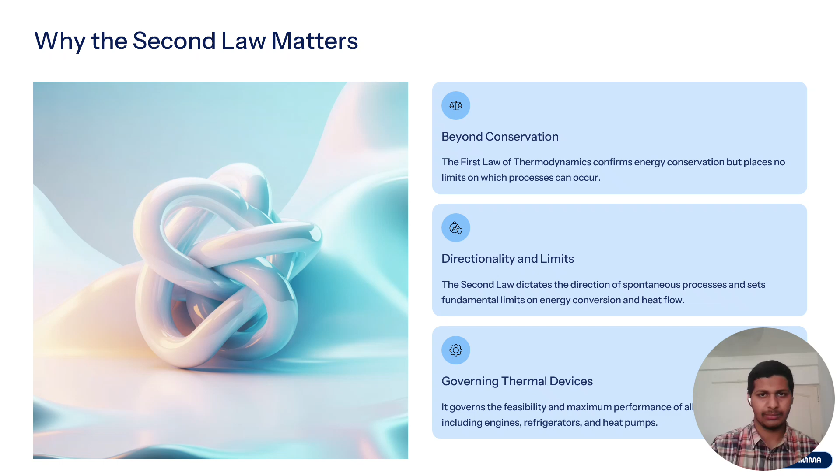Now let's talk about the Kelvin-Planck statement. The Kelvin-Planck statement of the second law defines the limitation of the heat engines. It states that it is impossible to construct a device that operates in a cyclic process and produces no effect other than the extraction of heat from a single reservoir and the performance of an equivalent amount of work. In simple terms, this means no heat engine can convert all the heat it receives into work. Some part of the heat must always be rejected to a cooler sink.

This statement sets a natural limit on efficiency. Even the best designed engines like steam turbines or car engines cannot be 100% efficient because of this unavoidable heat loss. So, the Kelvin-Planck statement reminds us that every real engine must have both a heat source and a heat sink, and that some energy will always be lost as waste heat, making perfect efficiency physically impossible.

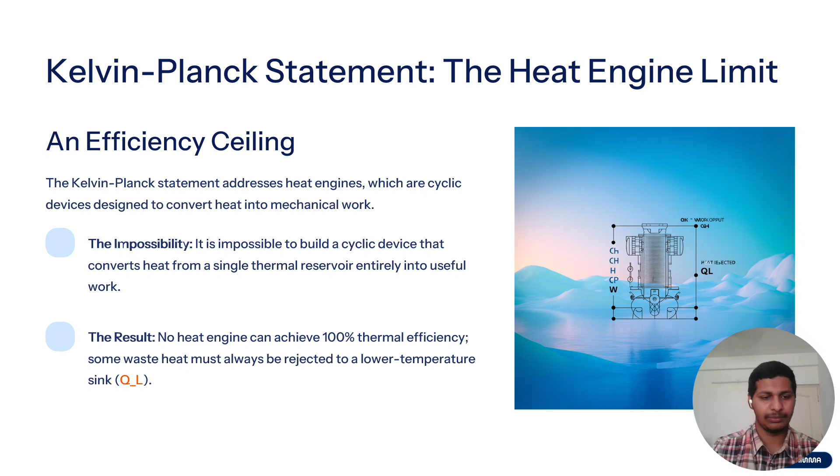The Clausius statement of the second law explains the limitations of refrigeration and heat pumps. It states that it is impossible to construct a device that operates in a cycle and transfers heat from a colder body to a hotter body without any external work. In simpler terms, this means heat cannot flow naturally from cold to hot. It requires an input of work.

This is why refrigerators, air conditioners, and heat pumps need electric energy to run. The compressor inside does work to move heat against its natural direction, from the cold interior to the warmer surroundings. The Clausius statement sets the fundamental limit of refrigeration performance and explains why cooling devices always consume power. It also complements the Kelvin-Planck statement.

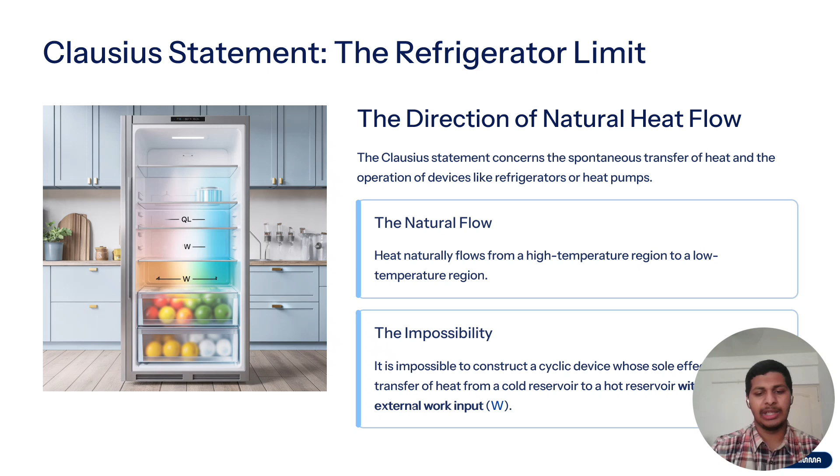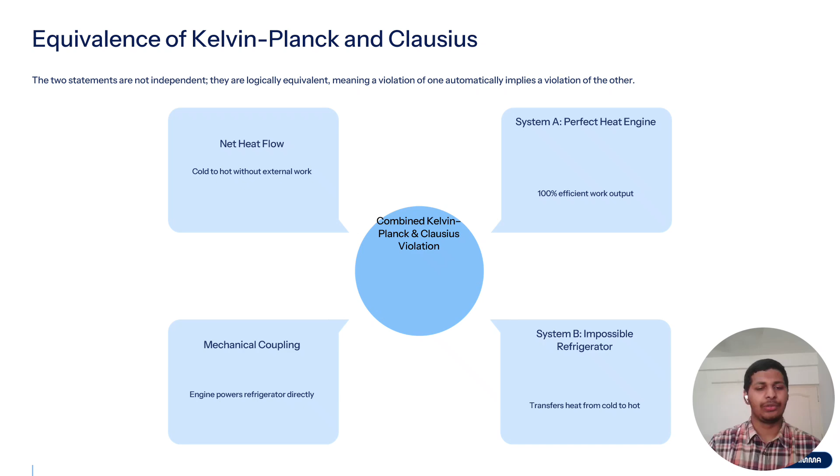While that one limits how much work we can get from heat, this one limits how much cooling we can achieve without work input. These two statements may sound different, but they are equivalent. If one could be violated, the other would also be violated. For example, if a refrigerator could transfer heat from cold to hot without work, we could combine it with an engine to make a system that produces work with no heat loss, violating Kelvin-Planck. So both statements express the same fundamental truth.

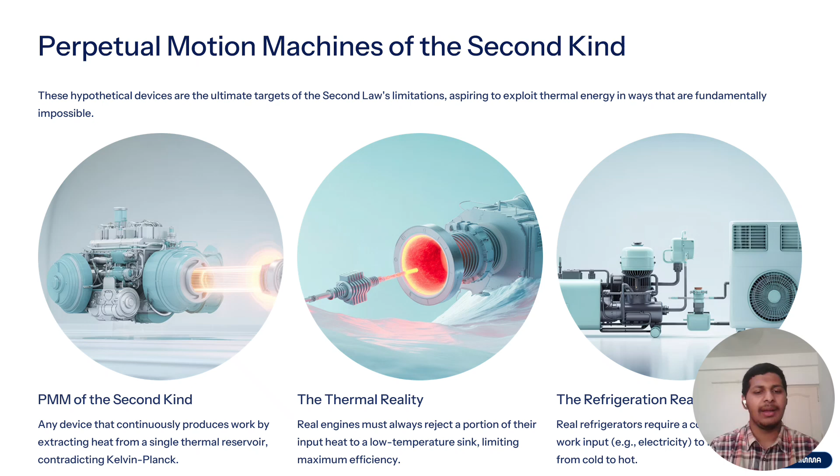These two statements relate to the design of a perpetual motion machine of the second kind, or perpetual motion machine 2. It is a hypothetical device that converts all absorbed heat into work continuously without losses. The second law tells us such a machine is impossible. Real machines always have friction, losses, and some waste heat, making 100% conversion of energy unachievable.

Let's consider a real-world application as a case study of the second law of thermodynamics. We have taken the example of heat engines. Heat engines are practical applications of the second law of thermodynamics. Examples include car engines, steam turbines, and power plants. In all these, heat from fuel is partially converted into mechanical work, while some heat is released to the surroundings. Engineers use the second law to maximize efficiency by reducing waste heat and improving the design.

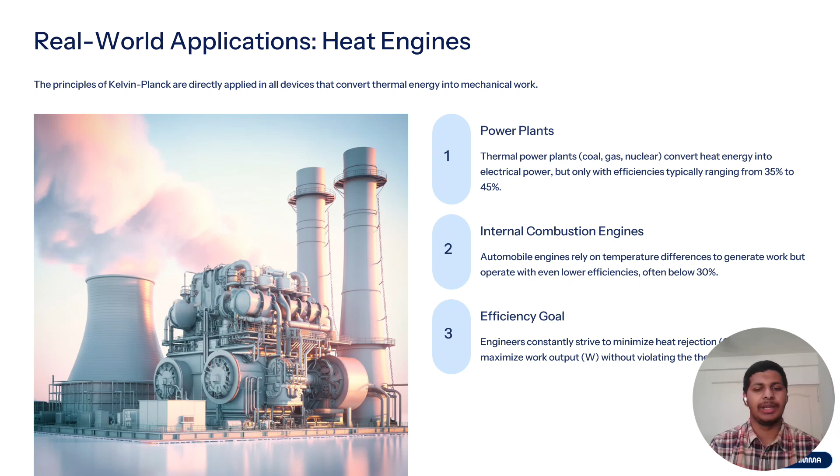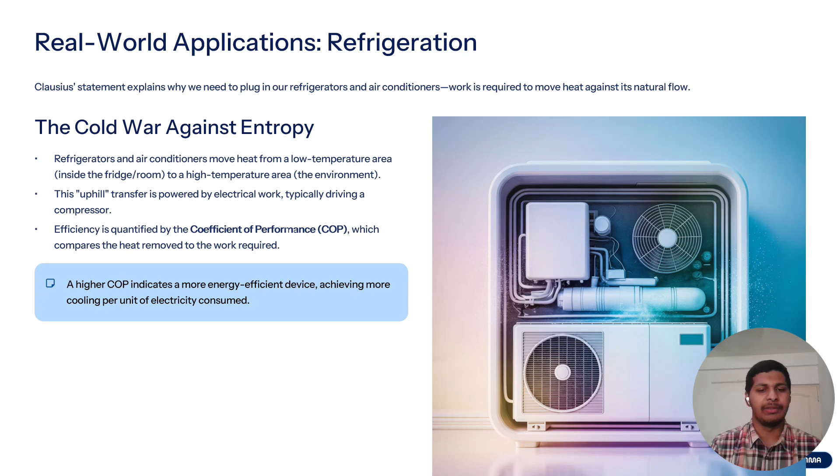Similarly, we have the real world example of refrigerators, which also follow the second law. The second law also governs refrigerators and air conditioners. These devices use mechanical work to transfer heat from low temperature regions to higher temperature regions. Understanding this law helps us design systems with better coefficients of performance and lower energy consumption, like modern inverter ACs and eco-friendly refrigerators.

Let's look at the role of entropy and the irreversibility of processes. Entropy is one of the most important ideas in the second law of thermodynamics. It is often described as a measure of the disorder or randomness in a system, but more accurately, it represents how energy spreads out or becomes unavailable for useful work. According to the second law, during every natural or spontaneous process, the total entropy of the universe always increases. This means that energy tends to become more disorganized over time.

For example, when heat flows from a hot object to a cold one, or when fuel burns, some energy becomes unusable. This makes the process irreversible. You can't make the heat flow back naturally or unburn the fuel. In engineering, understanding entropy helps us analyze efficiency and energy losses. It tells us why no machine or process can be perfectly reversible and why real systems always generate some waste energy.

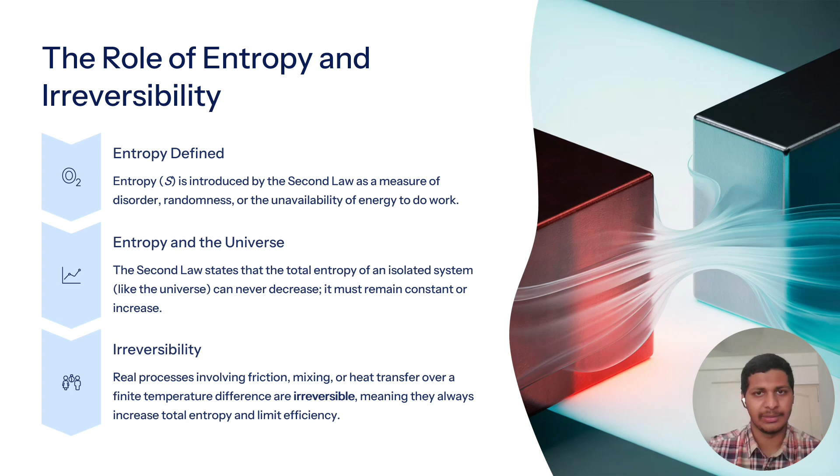To conclude, the second law of thermodynamics is not just a theoretical concept, it's a law that governs everything from machines to life itself. It tells us that while energy can change form, it can never be completely converted into useful work. There's always some loss in the form of heat or increased entropy. This is why no engine can ever be 100% efficient and why refrigerators need continuous power to operate.

The law also introduces the concept of entropy, which helps us understand the irreversibility of natural processes. For example, why heat flows spontaneously from hot to cold and never the reverse. In essence, the second law sets the limits of efficiency and defines the direction of all real processes. It forms the foundation for energy conservation, environmental sustainability, and modern engineering design. So, the second law reminds us that while we can never beat nature's limits, understanding them helps us design smarter and more efficient systems. Thank you.